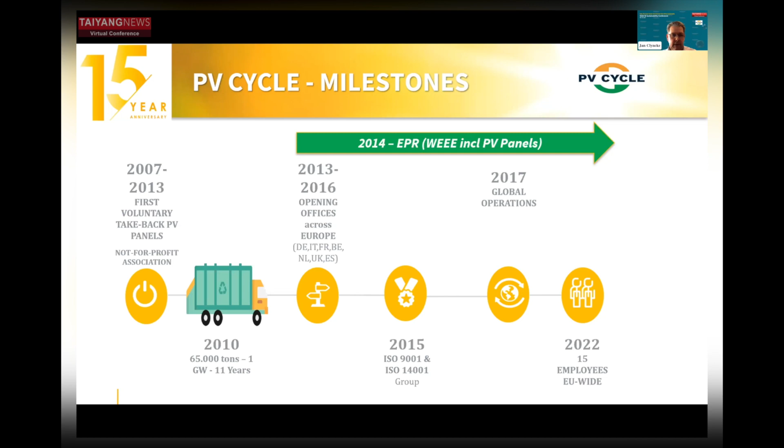And in the meantime, we achieved some milestones like managed quality systems and the like. And then immediately I go to the services we are offering. So on the right side of the slide, you see the legal compliance upstream. So that's the 7 obligations each company which is putting PV panels, but also TV sets, washing machines, and the like, on the territory of each of the 27 European countries has to comply with. And obligation number 4, organization of waste management, is one of the obligations PV Cycle is executing.

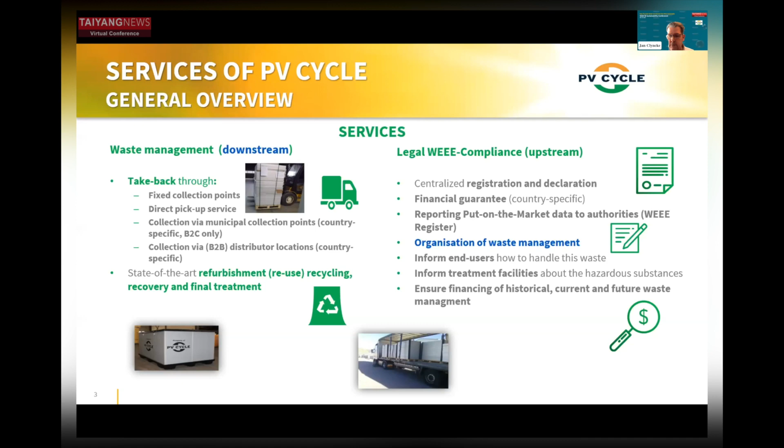So we have a kind of upstream service, and what we call the waste management is then the downstream service, whereby we really organize the take back, the collection through fixed collection points, direct pickup service, and the like, and then also organize, of course, the recycling. I will not spend too much time on PV Cycle itself and our services, but focus now on the treatment a little bit and how it all works. Maybe a slide which is needed or not needed in this group.

But again, when I saw for the first time a PV panel, and in my past before PV Cycle I worked in the waste industry myself, for me it was a laminated flat glass, nothing more than this. Because mainly, if you look from a material perspective to a PV panel, you see a lot of glass. It consists of a lot of glass, a bit of aluminium, and then the remaining items are really very small, very limited, especially in tons or in kilograms or even in grams. It becomes very small, the plastics and the metals and semiconductors. So that's an important element.

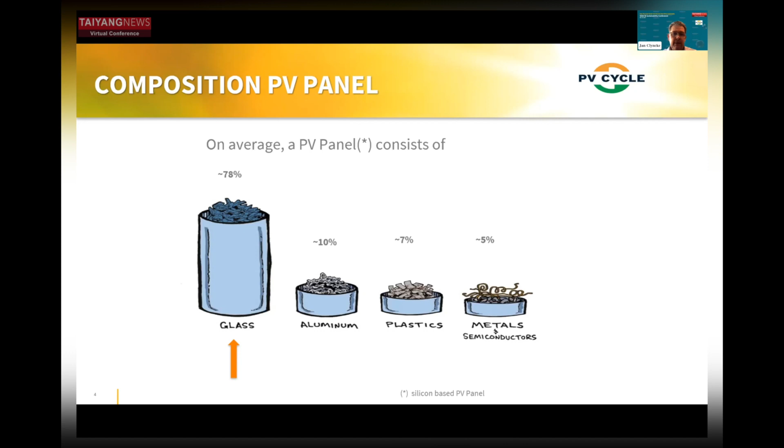It would have been, I would say, much better if it was 78% aluminium and then 10% glass and so on. It would already have been a different mindset. So it's a glass product. It's very important to understand this, to realize this when you talk with recycling and the waste industry. So it's really comparable, sounds a bit weird, to a glass in your car or a glass in your building. So that's, from a material perspective at the end of life phase, what a PV panel is.

If this also does not work, you can start to do energy recovery, so incineration, whereby you recover the energy and you heat up hospitals and other infrastructure. And the worst case, let's say, is disposal, or what is also referred to as landfilling.

When you look to the current situation, even though we have a minimum amount of waste, the PV industry is doing very fine. It's great because we are preventing a lot of waste. We are preventing a lot of cost for society during many years because you have a long guarantee, product-wise, performance-wise. And yes, reuse of PV panels is a huge potential. I think the last speaker of today will also zoom into that probably a bit.

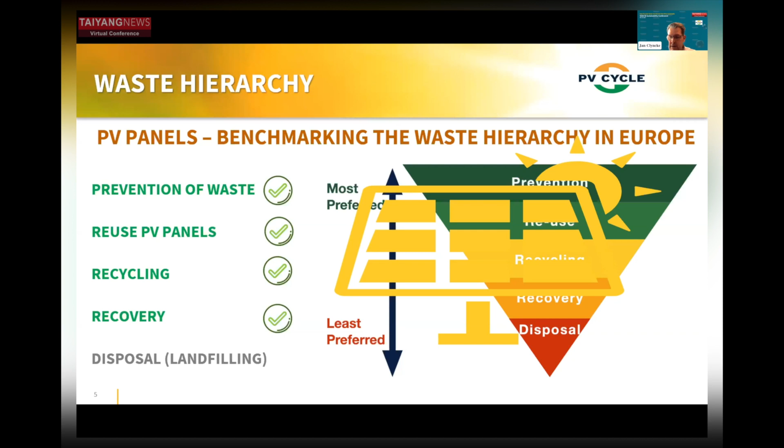And then recycling, recovery, we are doing very fine on all those points as PV industry. The only challenge is today that, yes, you are installing a lot of PV panels, a lot of PV installations, amazing, gigawatts and terawatts and non-stop, but there is no waste. There is no waste. We all wait here for waste amounts, and that also helps to optimize things.

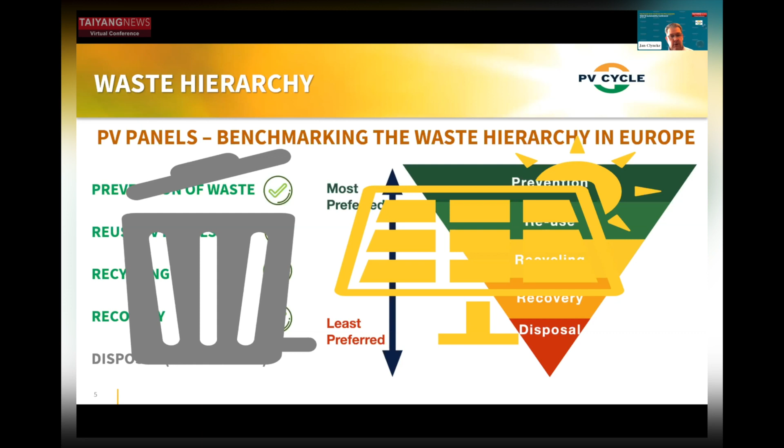As you saw with the previous speaker, a recycling line of 12 megawatt, I did a very quick calculation, that's 720 tons. In the waste business, they are treating this amount in one day. They have this kind of capacity. They process it in one day. And in some countries, there is only 700 or 500 tons of PV panel waste generated here in Europe. So today, a lot of panels are put on the market, a lot are sold, but nothing is coming back. Nothing is coming out of the market.

And zooming in on the steps of the waste hierarchy, I would say prevention. It's often forgotten by this industry, and I would like to put it a bit more into the picture so that all of you start to promote this, because as an industry, you are one of the few industries, one of the front runners, doing a lot on preventing waste. You have a product guarantee of 10 years. Most of you put in place a 20 years performance guarantee.

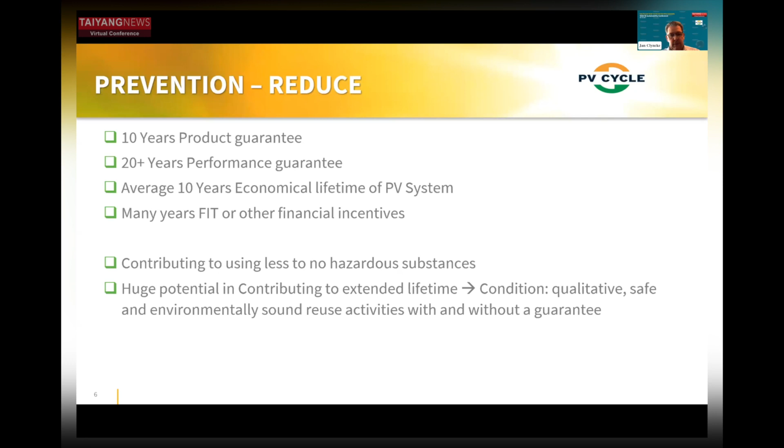The average economical lifetime of a PV system, even as repowering and revamping start, is easily 10 years. Many countries have feed-in tariff systems and financial incentives in place. So all things which are really keeping those panels working and generating electricity. More and more, you also see that less and less hazardous substances are used in PV panels. And there is a huge potential in contributing to extended lifetime with a qualitatively and environmentally sound reuse activity, whereby you can maybe again give a limited guarantee on the PV panel or not.

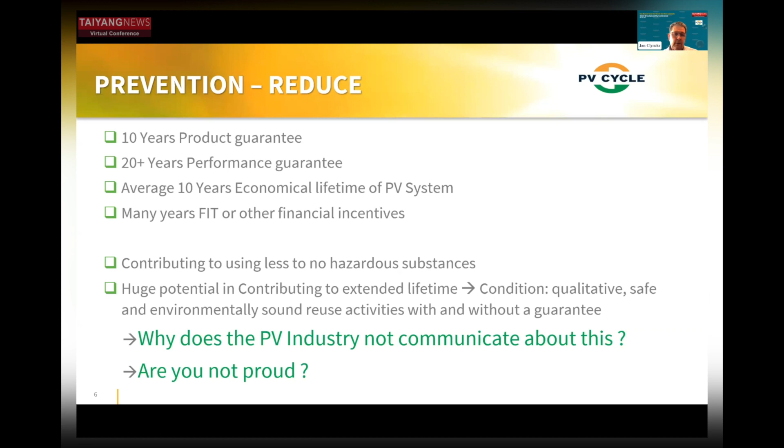And then the big question is, why is this PV industry not communicating about this, why are you not proud about this? It's an achievement. You are avoiding waste, you are avoiding cost for society for many years. So that's something I invite you to share a bit more on social media accounts and buzz it around.

What about reuse then? The second step after prevention, reuse. Well, we did a study in 2020. Among the high level recommendations were, it would be good to track the waste. That could also give us an insight into when it will come back, when part of it can potentially be reused, and when a part needs to be treated as waste. That's one element, but the main one of the study was the recommendation on the preparation of PV panels for reuse.

Because today this is not existing, at least not in a standard or a technical specification, but we need to have some minimal testing requirements on visual inspection, electrical performance, safety tests, and the like, because at the end of the day, this is a product which is generating electricity and not consuming electricity like laptops, TV sets, and the like.

There, I'm not saying reuse is easier, but the discussion is sometimes like, okay, if a laptop misses one key on its keyboard, you replace it and it works again. Yes, that's true, but it's also a product which is not generating electricity. But here, a PV system really has a big importance. It has to be qualitatively good, it has to be performing well, also if you are planning to reuse PV panels. So that's why you have to have clear quantitative criteria.

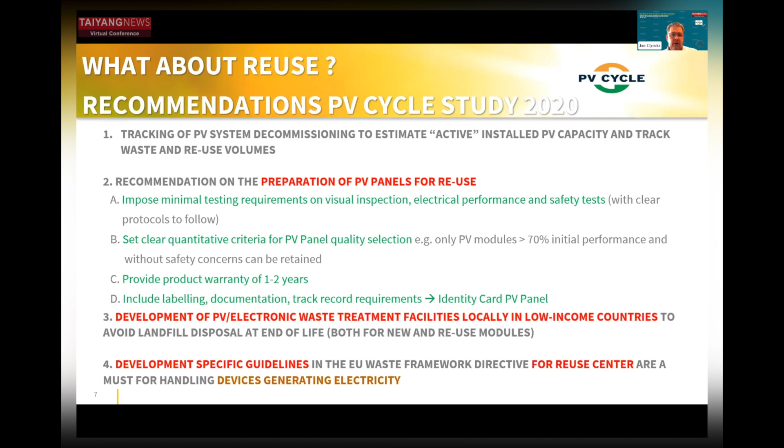And then, of course, the fourth important recommendation: develop specific guidelines. Okay, this is referring to Europe now in the Waste Framework Directive, but specific guidelines for what is a good reuse center for PV panels. That the people who are working on that PV panel know something about electricity, about AC and DC and the like, and that at the end of the day they can deliver really qualitative and safe secondhand PV panels.

And that's also why PV Cycle started within IEC, in technical committee 82, opening the discussion. Okay, we want a standard or a technical specification, at least something on an international basis. This work did not start because we were welcomed with the proposal; we first had to draft a technical report. Today, more than 30 technical experts worldwide are present in that group. We invite you as well through your national standardization committees to join this discussion. The coordinator is funded by PV Cycle, and we expect to deliver the technical report by October 2023.

And then TC82 will decide, okay, what do we now want? Is there really a need for a standard or a technical specification? And we hope they will decide in favor of this.

What about then recycling or the treatment of PV panels? Just to highlight a little bit: at one point in time, waste is generated. You have an end of life or an end of use situation of a PV panel. Somebody decides, I throw it away. Okay, it's collected. And at the end of the day, it ends up at the first treatment plants where the activity is about separating the junction box and the aluminium frame, with different kinds of technologies and techniques.

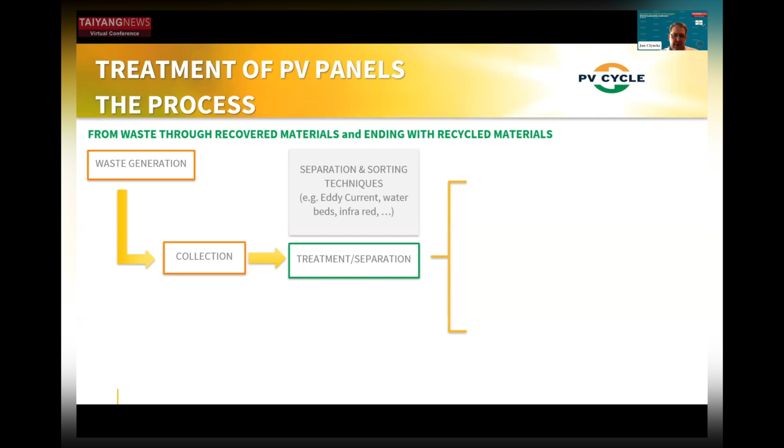I hear about hot knife technology. Okay, that's a new trend maybe coming from the PV industry, but in the normal recycling and waste business, existing for more than 100 years, they also already have many separation and sorting techniques: eddy current technology, water bed technology, infrared, and many more, to at the end of the day come up with material out of those activities. It can be glass cullet, the shredded plastics, maybe the cells containing the silicon and the silver and the like.

And at one point in time, you recover those materials through those techniques. They can also be recovered through other material recovery, that means smelters, for example, or they can even be recovered by energy recovery, when they are sent to waste incinerators. When they are recovered through material recovery, you can easily say, okay, aluminium goes back into the recycling of aluminium, silicon goes in this direction, and so on. All those recovered products can be sent to the final recycling activity.

But it can also be that if a part of the material is incinerated, you also have an added value, because you recover energy, which then provides energy to, as I said, hospitals and other infrastructure, and can even generate electricity again out of those incinerators. So that's all happening today. That's all possible.

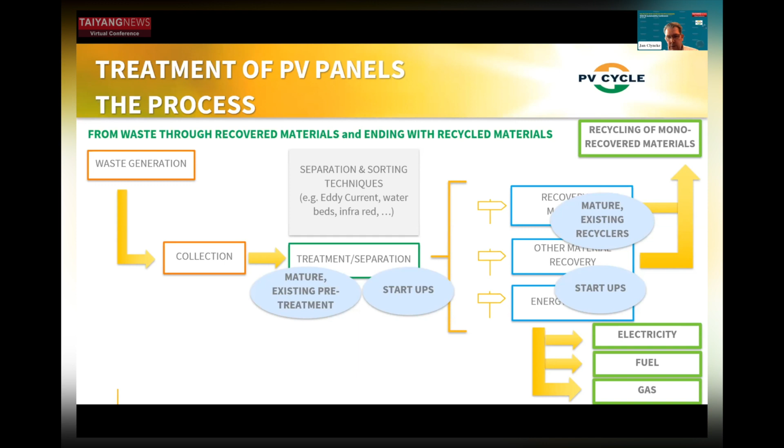And there are many options. We also see today, as I said, a lot of mature existing pre-treatment facilities, companies which are 100, 200 years old. You have a lot of startups coming in. And we always have a first treatment activity and a second, or final, treatment activity. There also you see a lot of mature existing recyclers, and you also see a lot of startups.

And some of them, yeah, you see some of them focusing on recovering the silicon. Great, they are just starting up, and they acquired 7 million euro. You have others, also recent news, they just got 2.5 million. You have some others, all of them great.

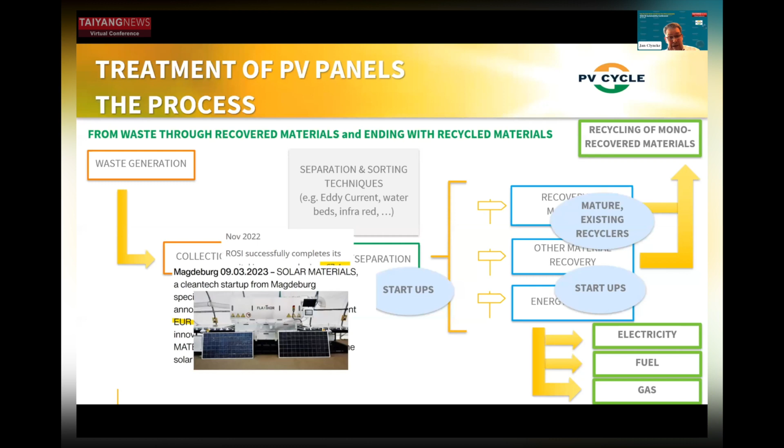But if you have to fight against the big guys, this is an example of an annual report of 2022 from one of the big waste treatment plants. These guys are talking in billions. So it will be very challenging. And I see a lot of promising startups, many of them, super nice things. But it will be really challenging.

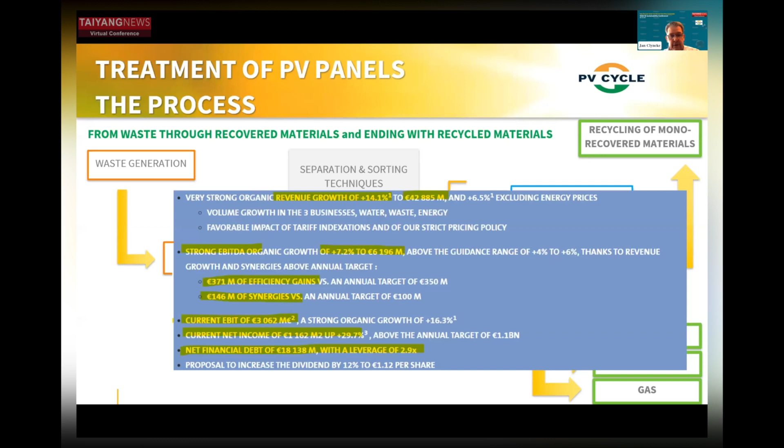Collecting 7 million, collecting 2 million, well, that's nice, very nice. But guys, you need much more money to step in the big game of waste treatment, waste recycling, being able to treat 100,000 tons capacity per year. Then you really need a lot of money. So that will be, for me, the big challenge in the upcoming years, if the young startups will be able to survive against the big guys.

Treatment today, because people always think that it's terrible and whatever. No, I think on a laboratory and small scale treatment basis, and there are a lot of proofs already, we achieve, on average over all the technologies, an average technical recycling rate of 95%, so that's super great. But if you look to the current small industrial scale, you also saw it with the previous speaker, 12 megawatt is barely 760 tons. That's peanuts, that's nothing.

But at small industrial scale as we have today, we achieve an average recycling rate of 70% based upon weight. Well, that's great, guys, because if you look to the right corner at the bottom and you look to the recycling yields which other products under producer responsibility in Europe achieve, and these are results from, I think, 2018, then you see with the 70%, we are beating a lot of them.

A lot of products which are already since many years under extended producer responsibility, like packaging since 1999, the batteries since 2006, electronic waste since 2005, and the cars, okay, they achieve 88%, but a lot of things in a car are metals. So the 70% we achieve, the average one, is really good.

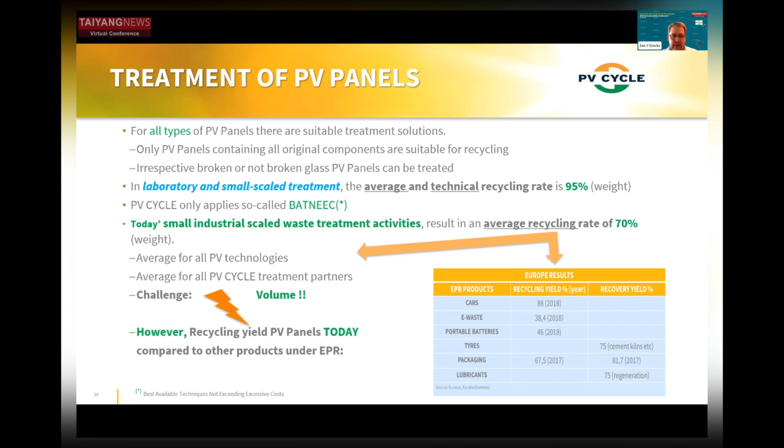The only thing we're missing is volume. We need waste. It does not sound nice. That's why I'm also saying promote a little bit more that this industry is contributing a lot to prevention, but we need volume. And if you have volume of waste, then you can optimize much more all your recycling and treatment capacities. And then also players will be willing to invest more into it and so on. But today, with the very small amounts we have, it is still too early to take the risk.

This is a little bit what we as PV Cycle have been looking for for 15 years, that one day we can say, regarding extended producer responsibility and compliance with legislation which is imposing this, that we can offer this kind of balance. Yes, you have some cost elements, and people often forget this, because I read a lot of articles from people claiming silicon is this price, silver is this price when it's recovered, and so on.

But you first have to collect the panels. You have to ship them. You have to treat them, first treatment, final treatment. You have whatever costs. You have administration costs, especially when you are under extended producer responsibility, like here in Europe. You have reporting costs and so on. And you have your overhead costs.

Well, if the value of your material can cover all that, that would be the perfect balance. Then we are at break even. But today, unfortunately, although it's going in the right direction, we have more cost than value. And again, do not forget the composition of a PV panel. 78% is glass, and then a minimal amount is some metals.

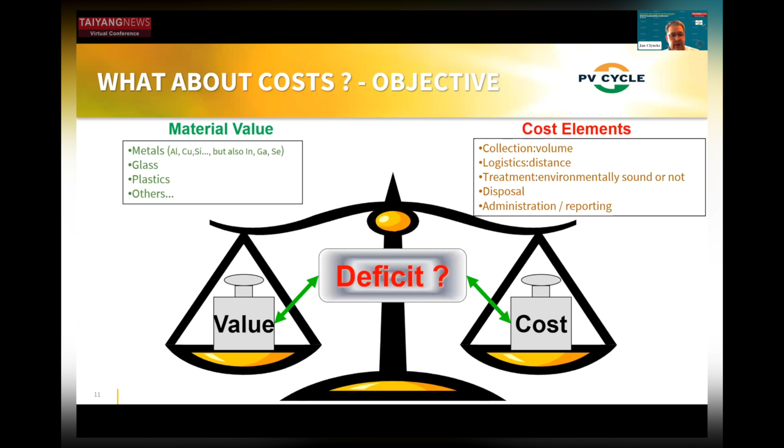And the metal prices are also going up and down, something I have never witnessed in my life before. The last 10 years, it's really a bit insane what's happening. Last slide, almost. Circular economy recycling, a bit of the broader picture.

Because a lot of people have maybe heard already that in Europe, for example, a lot of things are coming up very soon. You will have very soon mandatory eco-design and energy labeling requirements for PV panels and inverters. The announcement of the Commission is expected probably third quarter of this year. And then you will also have, on a voluntary basis, green public procurement and eco-labeling in place.

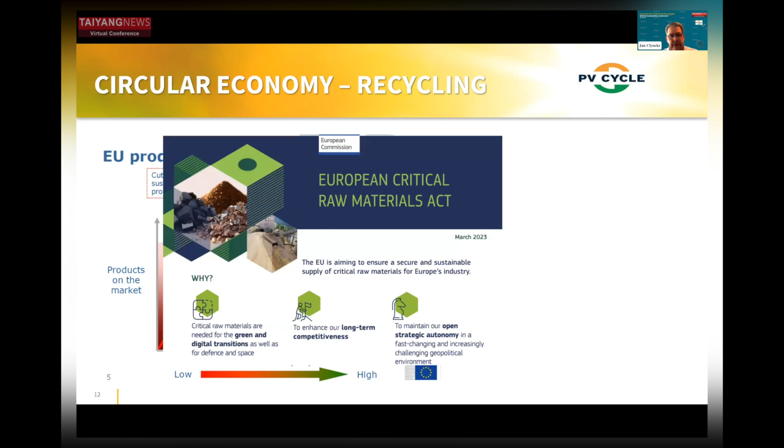You have maybe recently heard in Europe, that's only 2 weeks old, that the European Commission came up with the European Critical Raw Materials Act, whereby one of the commissioners even referred literally to solar panels. So also there, Europe is realizing that maybe there are some metals in PV panels which we have to ensure that we have on our own.

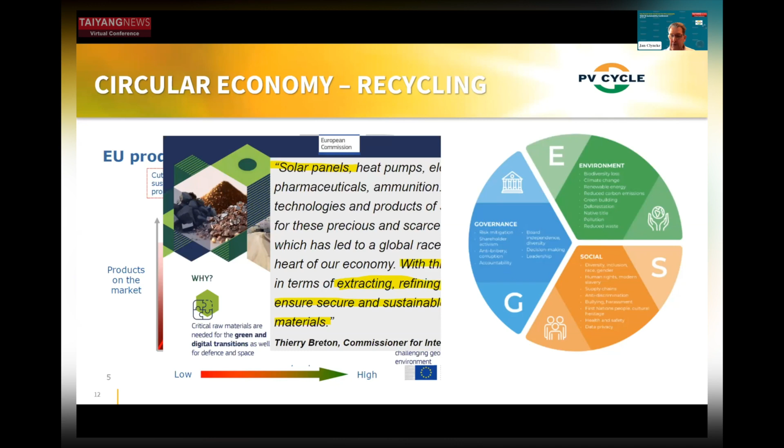And you also already saw it in the previous speakers, the ESG requirements coming up. So a lot of things are coming together. It's really a great momentum, let's say, but it's all coming together. So that's why I would say it happens today, circular economy and the whole topic about recycling of PV panels. And thank you for your attention.

Thanks, Jan. Great overview. Yeah, important topic. Interesting statement always is we need waste, while on the one hand we try to avoid it, and on the other hand we're still not having enough for the big recycling industry.

Quick question. You're talking mostly about Europe. I mentioned that probably the biggest amount of modules reaching the end of their economic life is here, simply because it started first. But now that we've seen so much technical development recently, we will also see more repowering. So those who got in later will also start replacing the modules earlier and not just wait until the end of the life. So what are you seeing on a global level regarding recycling?

I see a lot of interesting developments. If you take a tour around the planet, starting a bit at the bottom, I would say Australia. They have been discussing the item for, I think, 4 or 5 years. I hope that the current government will finally say, okay, now we go for it, and that also the industry, that's an important element, really says, okay, we go for it. This is not a cost element. It sounds maybe like a cost element, but it really gives you a lot of benefits in the long run, politically and otherwise as well. So Australia is going in the right direction.